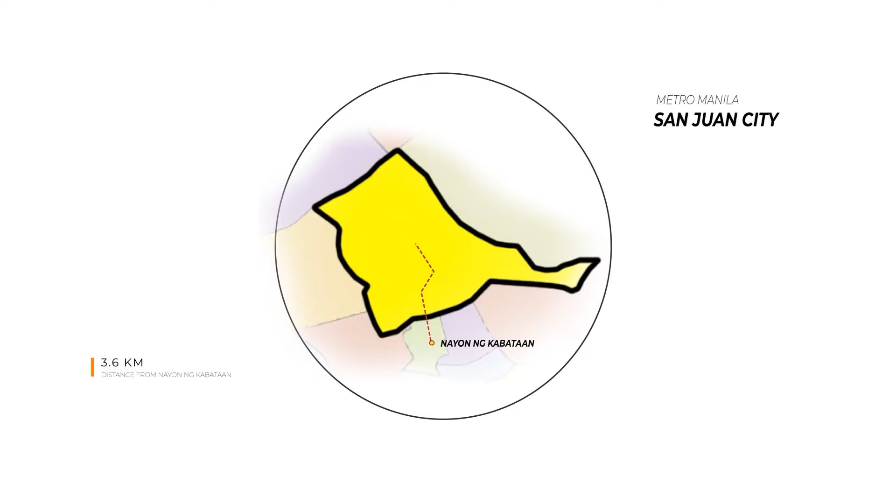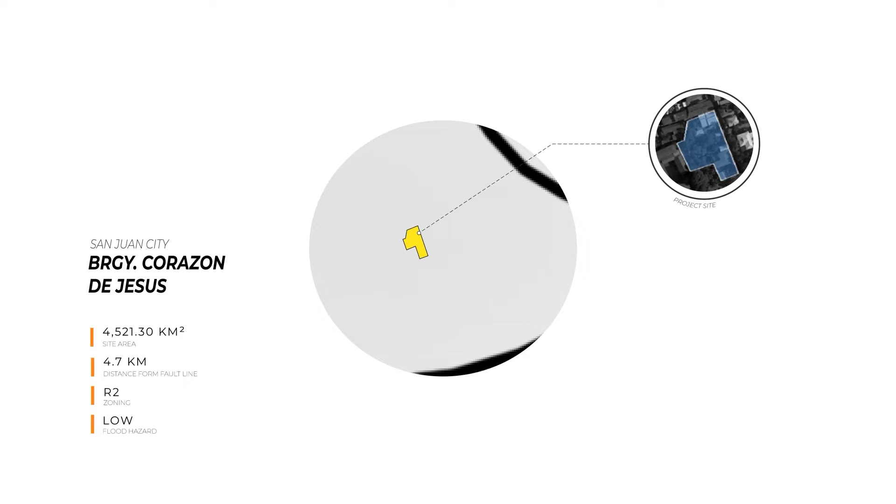The process of selecting the site includes the following: first, finding a region in the Philippines with the most orphanages closest to the DSWD, which is NCR. Second, we looked for a city in NCR closest to foundations that help age-out orphans, which is San Juan City. Third, we looked for an area near Nayon ng Kabataan, Virlanie, and TESDA, which is Barangay Corazon de Jesus. Fourth, we considered vacant lots with ample lot size, accessibility, and freedom from environmental hazards like distance to the fault line.

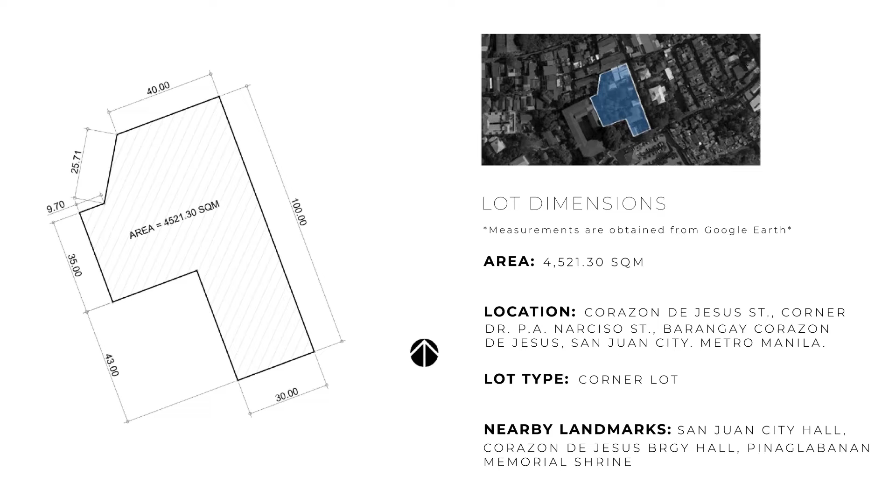We decided to choose this site located on Corazon de Jesus Street, corner Dr. P.A. Narciso Street, Barangay Corazon de Jesus, San Juan City, Metro Manila.

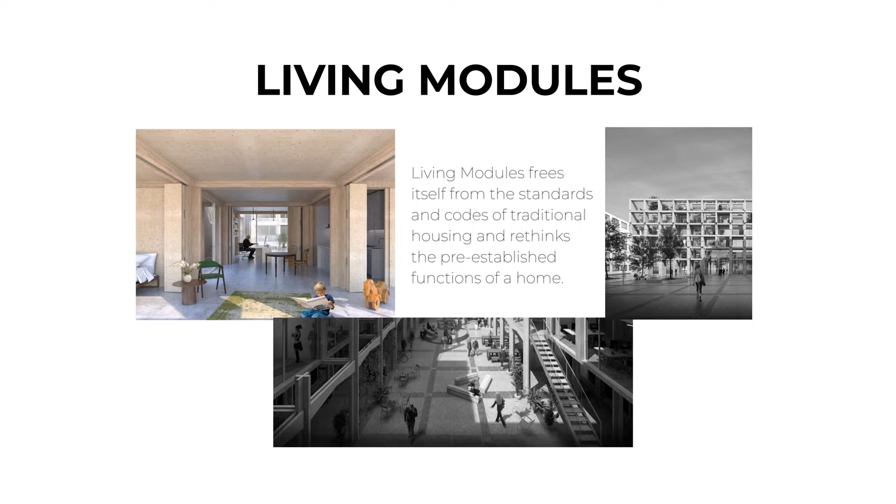We decided to adopt the concept of living modules by Studio Balem of Paris, a concept that frees itself from the standards and codes of traditional housing and rethinks the functions of a home. In living modules, each space is imagined as a cube with partition walls on all interior sides so that users themselves can decide how the space flows.

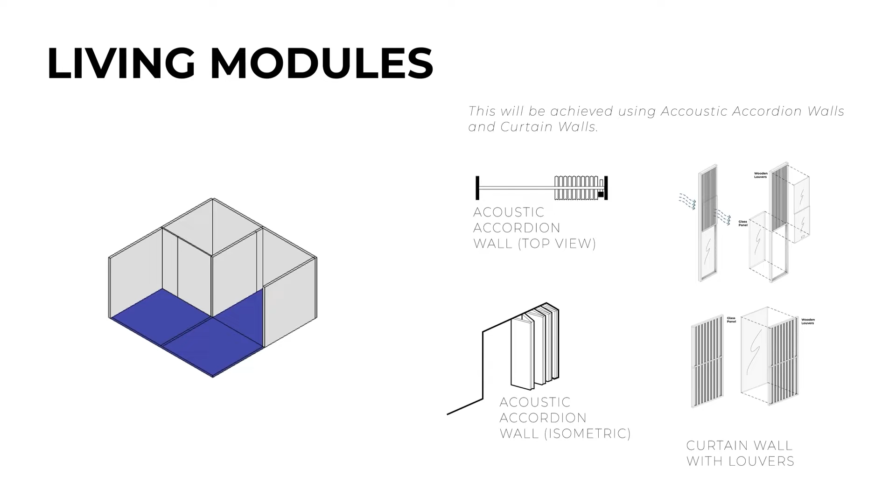We picked the concept of living modules since, in my personal experience, I value my space greatly, and there are times I wanted to switch up the space based on what I wanted to explore at that time, whether for a workout, playing instruments, or having a larger space where my friends and I could hang out. With a site dimension of...

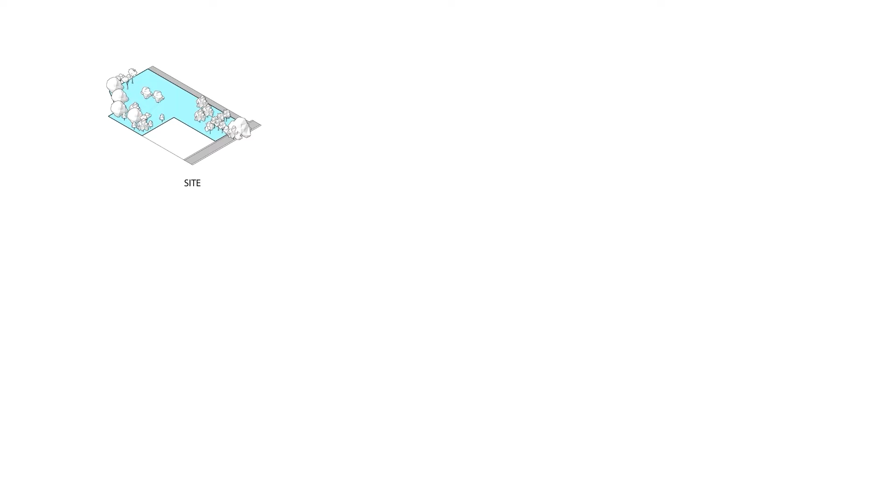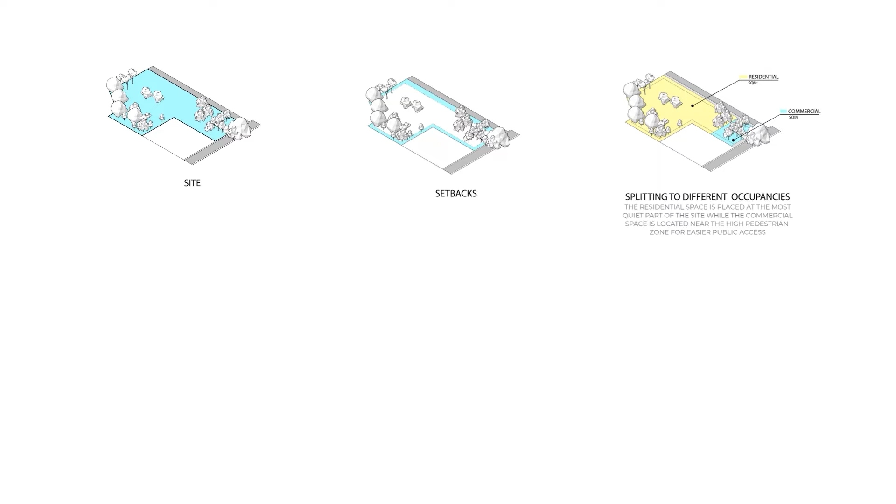4,521.30 square meters, adding setbacks, we are left with 3,328 square meters of buildable area. We first divided the buildable area into occupancies, residential and commercial, and added a perimeter wall in the residential area for privacy. Existing trees are also retained for acoustics and added shade.

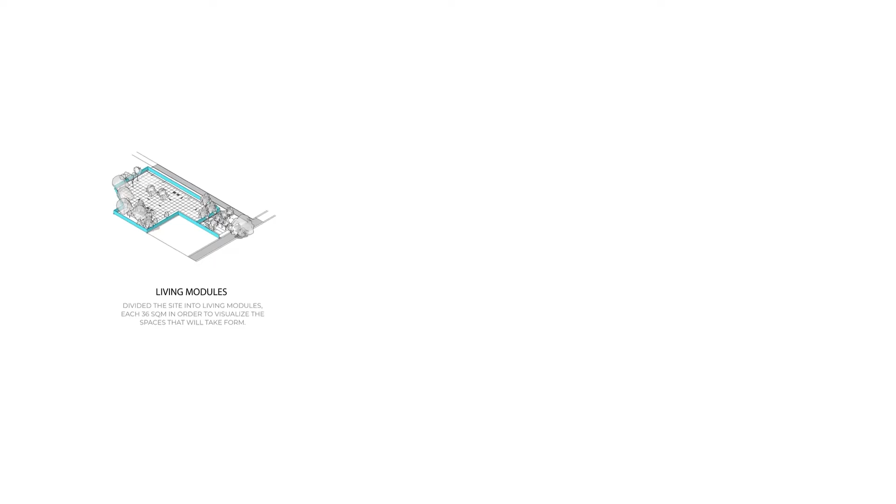Next, we divided each occupancy with a cluster of living modules. Then we grouped a number of modules together to create one space. The residential building surrounds the central courtyard and is made up of 5 floors. With all the space divided, here is the final form.

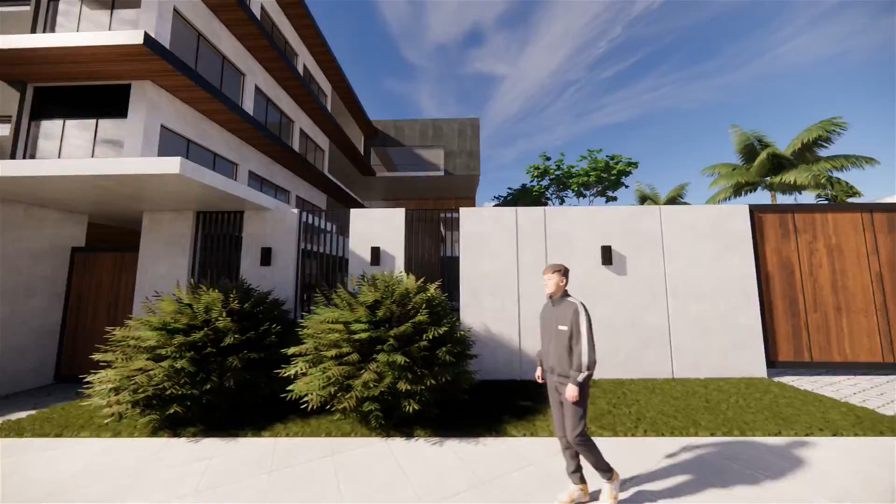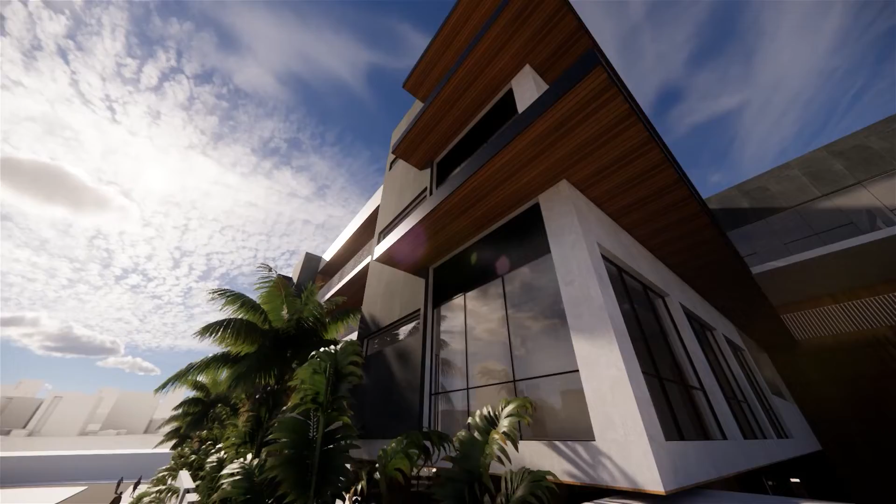There are in total 40 age-out orphans, from ages 15 to 18, that can be accommodated in the facility. Once an individual decides they want to leave the facility and make a life elsewhere, that is the time another age-out orphan will fill the space.

Together with the children are 2 personnel from the SWD that offer guidelines and regulate their saving system. 1 security guard is also provided by the SWD to protect the minors who predominantly occupy the space.

For communal spaces, we each picked a space that is more familiar to us, and imagined it on a much larger scale since it would be used by 40 people. Since I like to cook, I decided to design the kitchen and how it would look, while Isa and Kyla designed the other areas.

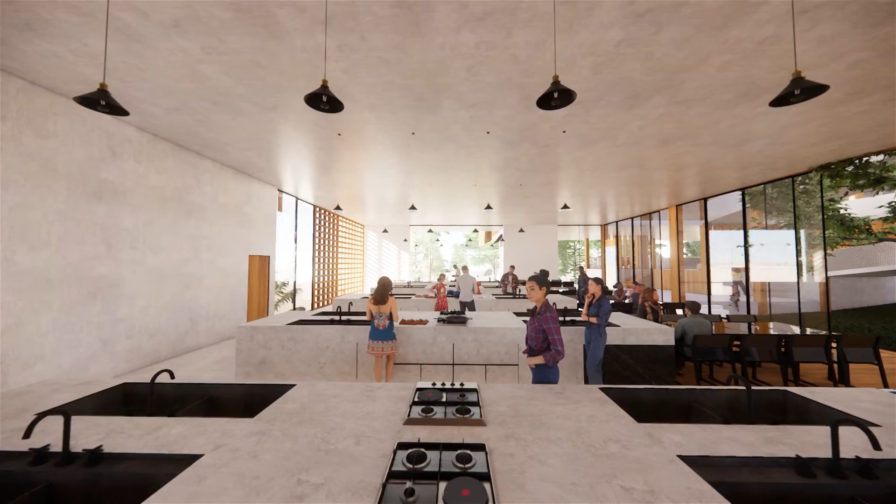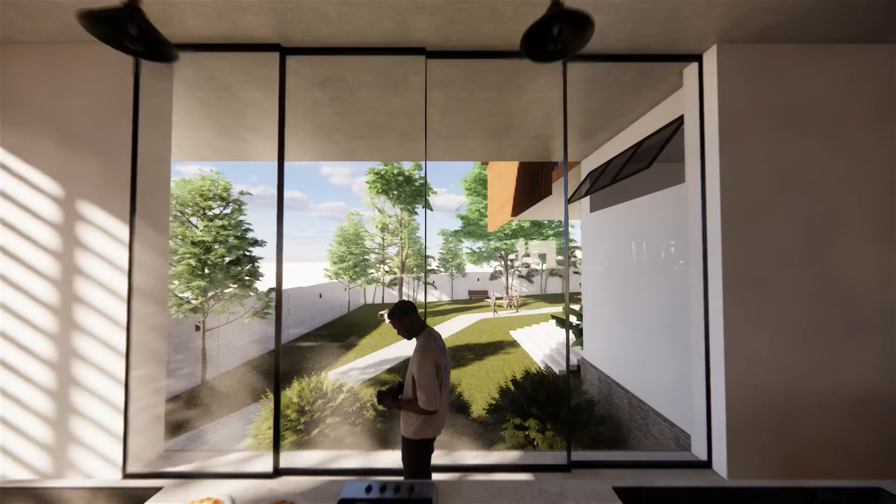The communal spaces include a kitchen with 10 cooking stations and 20 sinks, which is more than enough for the residents. It's also great since, in my experience, there are a lot of utensils and plates that need to be washed every mealtime.

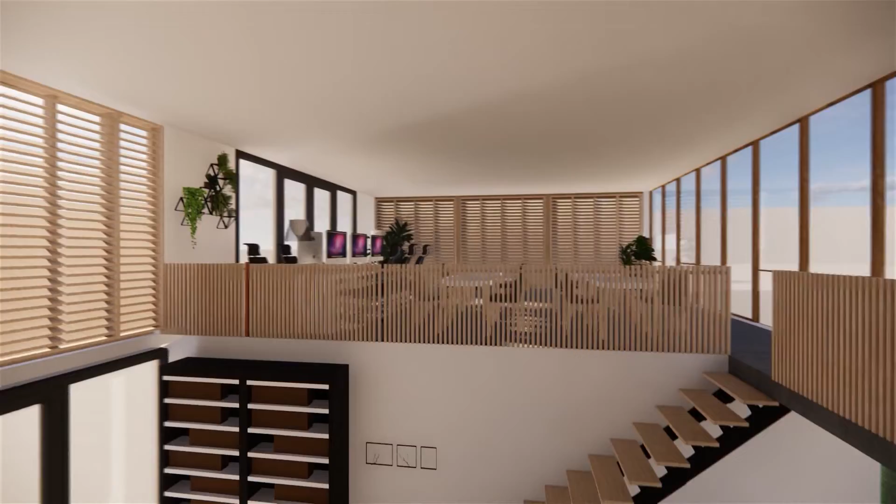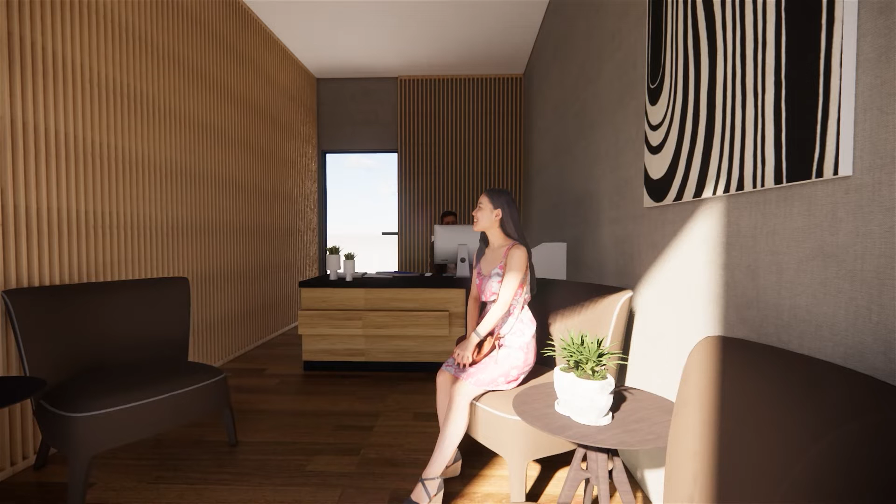A laundry area equipped with washing machines and dryers as well as a drying area. A two-floor study area with computers that the children can use for study, leisure, and work. And lastly, a clinic for minor medical emergencies and an admin office where they can always check in with the personnel that resides in the co-housing facility.

The private space is one of the hardest places we designed, and the technique we used to solve it is to think about what we wanted our own rooms to look like, and then we come up with the appropriate designs. The private spaces are units heavily inspired by the concept of living modules.

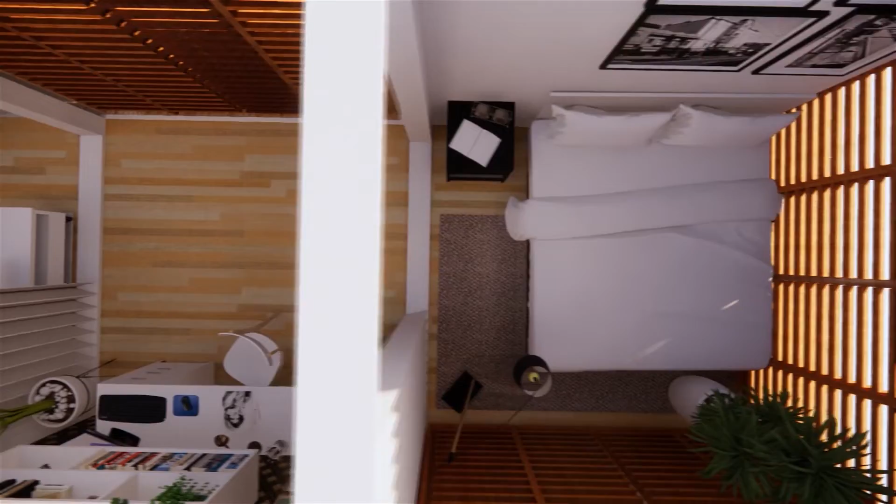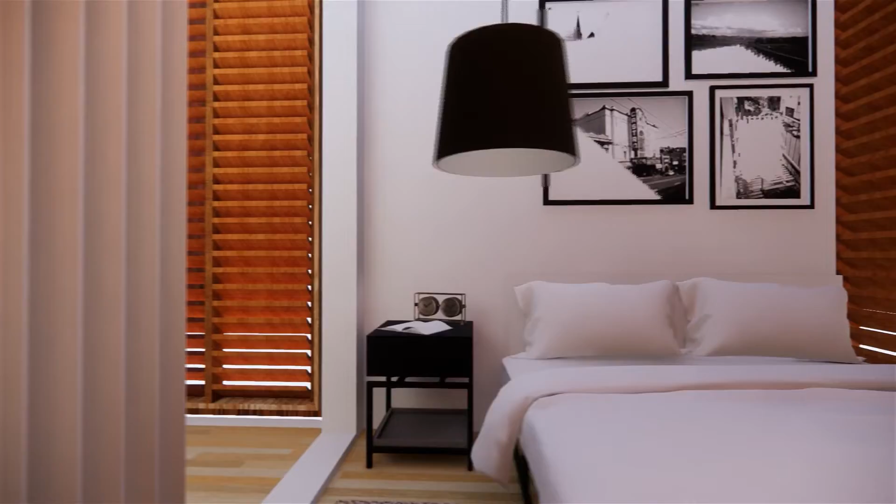There are single units and shared units. There can be 4 orientations of these units with a shared balcony. All residents are given 4 living modules, which is 36 square meters of ample space. These are generally divided into 4 spaces: bedroom, study area, living room, and their own toilet and bath.

For commercial spaces, we took inspiration from places that existed around us. Before the pandemic, I used to live in a condo unit in Manila, hence a lot of our facilities mimic the style of these facilities that I have seen before.

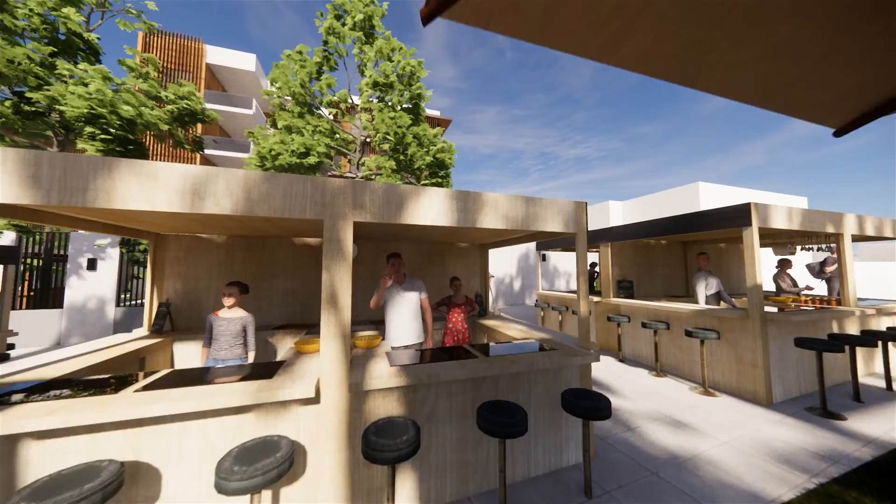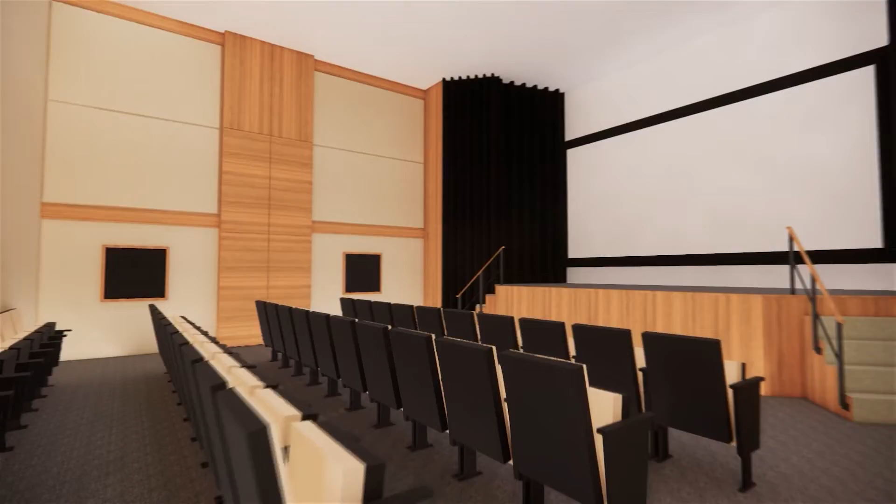There are commercial spaces that generate additional income for the users. There is the alfresco dining with 6 stalls, a gym that is open for the residents and customers via subscription, as well as a dance studio and a multipurpose hall available for renting. And lastly, there is a photo studio that is a lucrative business, especially since the site is near a school.

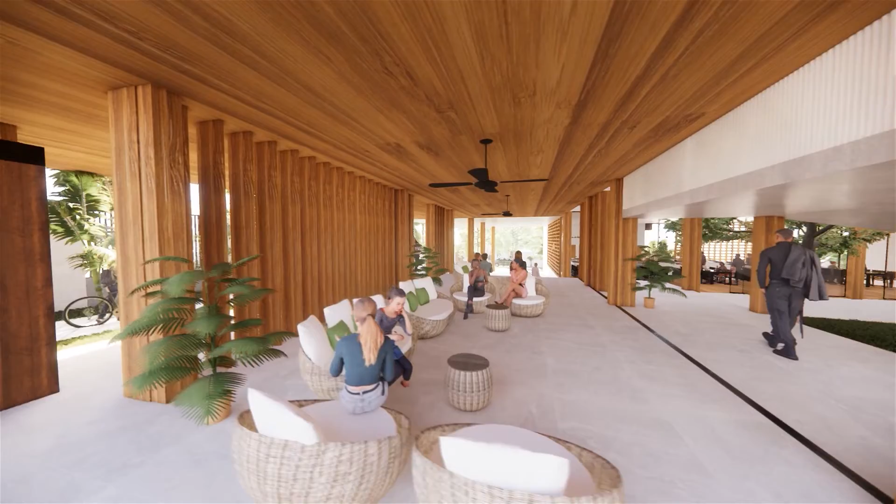One element that we also want to add to the project is sustainability. The communal areas are great for spontaneous connection and support the social fabric of the community. This will only strengthen their relationship with each other and hone their social skills.

Comfortability is gained by the concept of affordable housing, education, training opportunities, employment, access to support, and safety. All of these accumulate for them to have a more stable upbringing than what they have experienced in the past. Equality and diversity: in co-housing, the children are given equal opportunities to a better future that was not given to them originally. They are free to pursue interests that are tools they would use when they are adults.

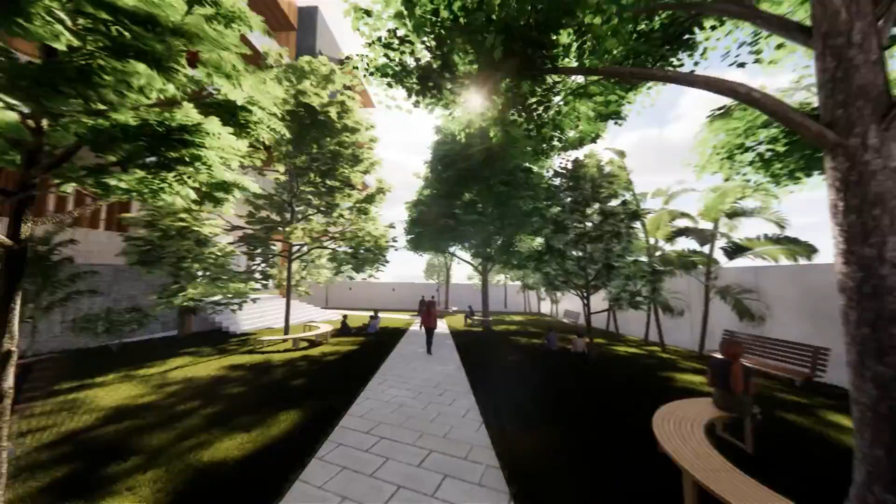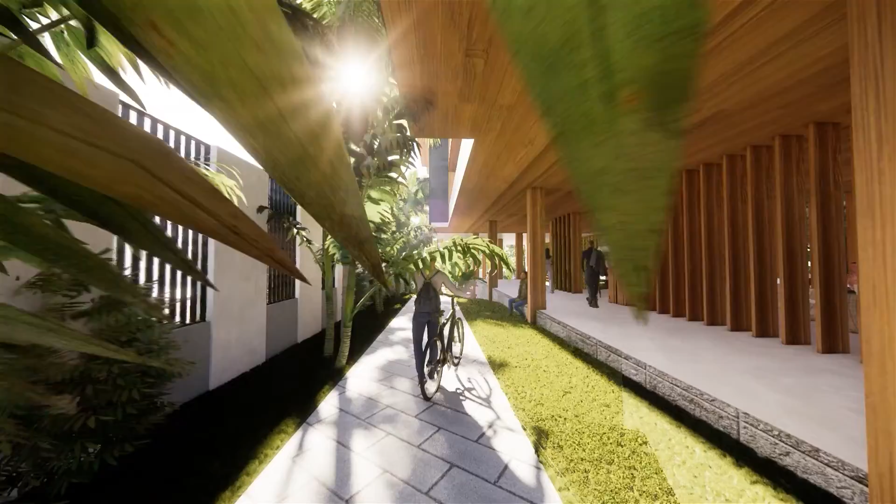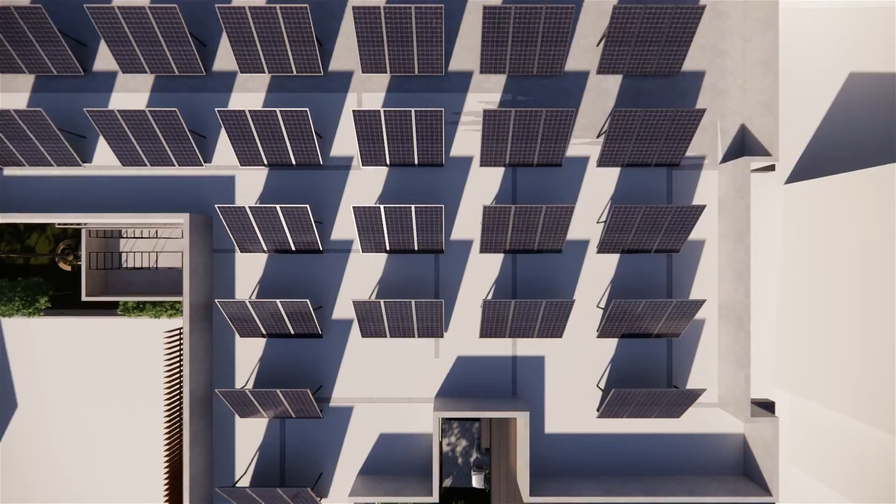For environmental sustainability, green spaces are transformed into recreational areas which can improve the user's health and wellness. The site is accessible, which promotes walking that lessens carbon emission. There are also systems in place to lessen energy consumption and water usage as well as aid in heavy rains: photovoltaic cells for solar energy, green roofs that lessen stormwater runoff and provide shade, and a rainwater system to use rainwater for water consumption.

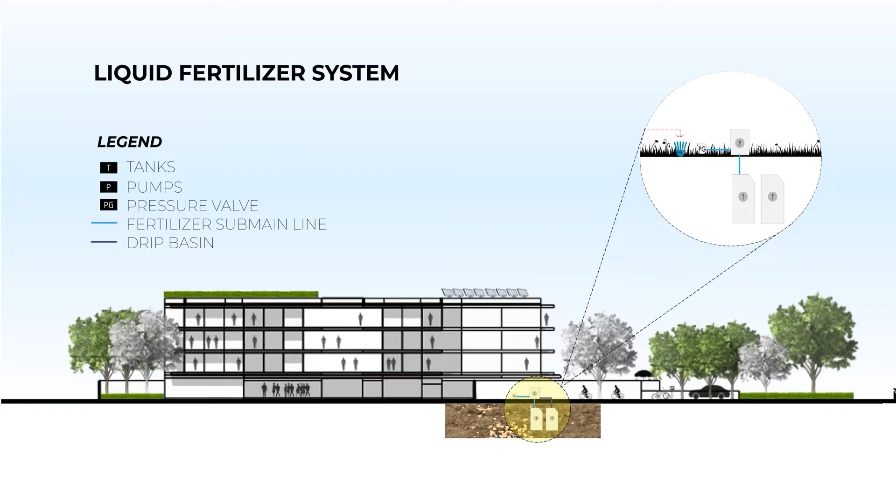Lastly is a liquid fertilizer system for the garden surrounding the estate. The building is made up of materials that are sustainable, and the building finishes are light and natural to lessen heat absorption.

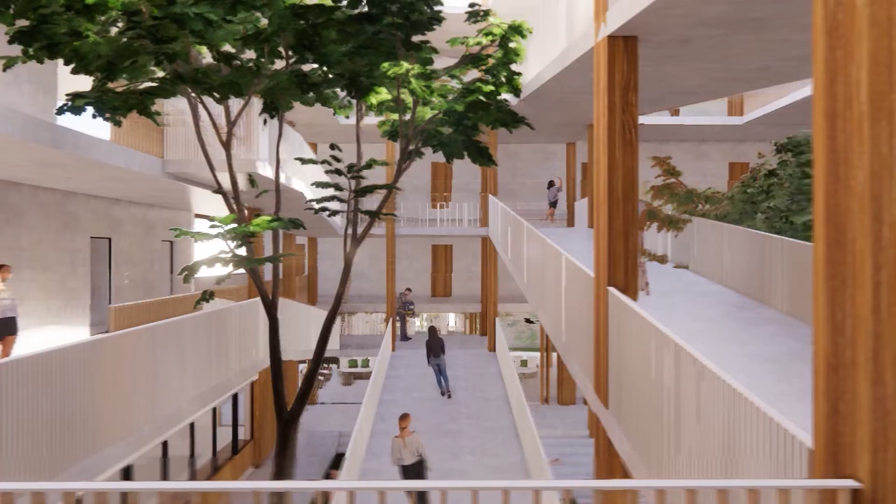For economic sustainability, one of the main goals of the project is to provide for the aged-out orphans, not only while they are staying in the facility but also after they have decided to build a life on their own. Government subsidies are used for their daily living, while academic scholarship grants are solely for their education and are in safekeeping which they have access to.

The commercial areas will also give the residents entrepreneurial skills and are also for sustaining their daily living and maintenance of the building. Lastly, the solar panels and the rainwater systems help to alleviate utility costs.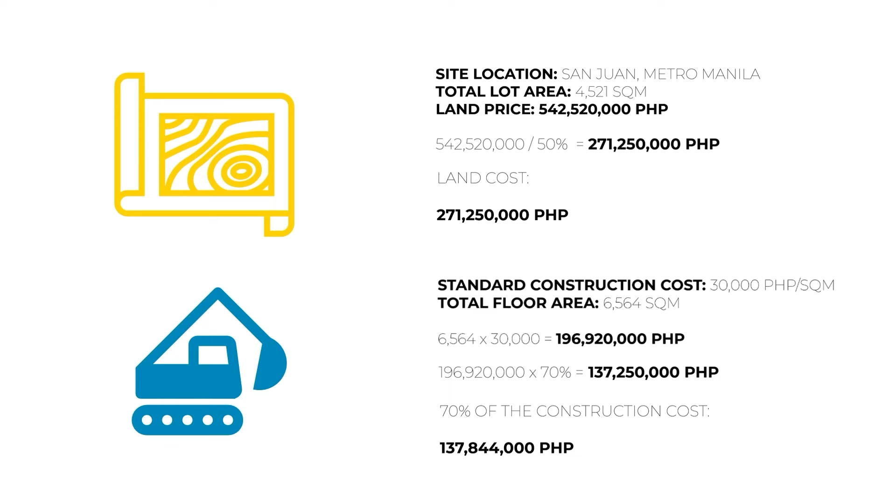And after this, due to inflation, the projected income would most likely increase and ensure the stability of the facility.

Square One Co-Housing Project wants to address contemporary issues facing housing and community in the context of providing homes for the aged-out orphans. We wanted to develop a sustainable, innovative, and responsible design that will cater to the needs of the children. Lastly, we wanted to improve the lives of the abandoned and neglected children, especially those who are not adopted, giving them a chance at being able-bodied citizens in the future.